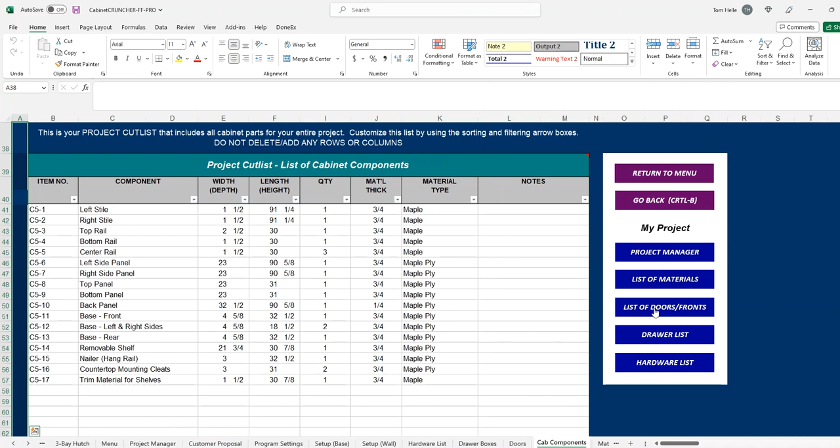Okay, so now everything's pretty well set for this cabinet, and I can make any final changes that I want to. And I'm just going to go ahead and add that to my project. So I'm going to click this Add Cabinet to Project button. And now I've got my cabinet here. And if I wanted to, I could go look at my list of materials, and my project cut list is getting started. My door list is getting started. My drawer box is getting started. And I've got my hardware list.

All right, so now I'm going to go back and look at my next cabinet. This happens to be the 4-drawer base cabinet here, so I can go right back to the menu, and I can pick up my 4-drawer base cabinet, and this time it's going to just be a regular base cabinet. The width is going to be, in this case, 24 inches. The height is going to be 34.5,

and I can bring in my construction preferences, and I'll scroll down now, and this time I'm going to adjust the overall height here. I can make adjustments to this any way I want to, but I'll go ahead and make the adjustments to my cabinet opening sizes. And again, I'll go in here and say, in this case now I want a drawer front, and I'll put just one of those, and I'll do the same thing for these next openings. These will be just stacked drawers, and that is all finished.

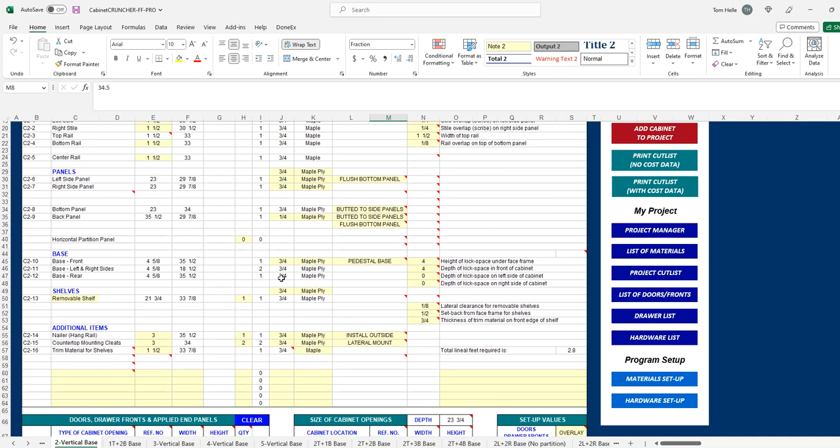So I can go back to my menu screen. I can pick up this 2 vertical, and in this case I've got a 36-inch wide, and again it'll be 34.5 inches tall. And I can come down here and I can import my cut list settings, and I can come down, and in this case I can make my adjustments to my upper opening size, and I've got this set up how I want it, and I put my hardware requirements in.

I got a couple of drawer slides, and I got a drawer handle. I got one of those, and I've got, let's see, a couple of doors that I'm installing on that cabinet, so I'm going to have 4 hinges, and then I'm finished with this one. And I can go ahead and add that to my project. And now I've got my 3 cabinets in there, and I can continue on with all the rest of these cabinets if I wanted to, but you get an idea how quick this is to work with.

So now that I've got my cabinets in here, I have a very good idea. First of all, I've created the cut listing for all those cabinets, but I also know that I've got a list of materials, and I know how much my materials are going to cost, and my hardware, and everything else that I want to install in this cabinet.

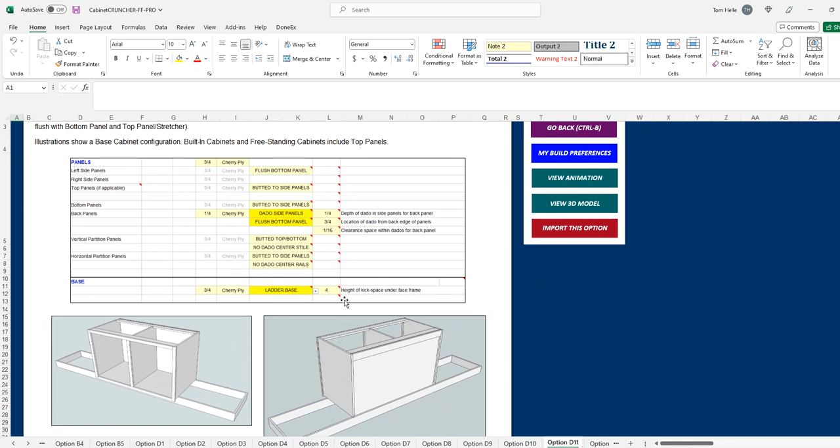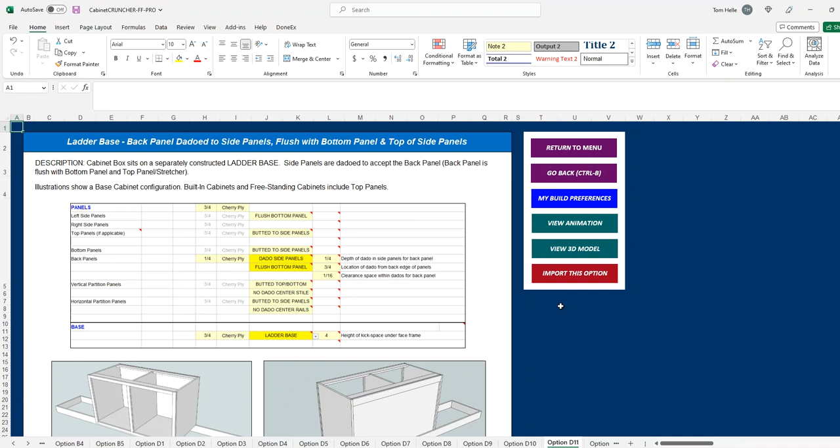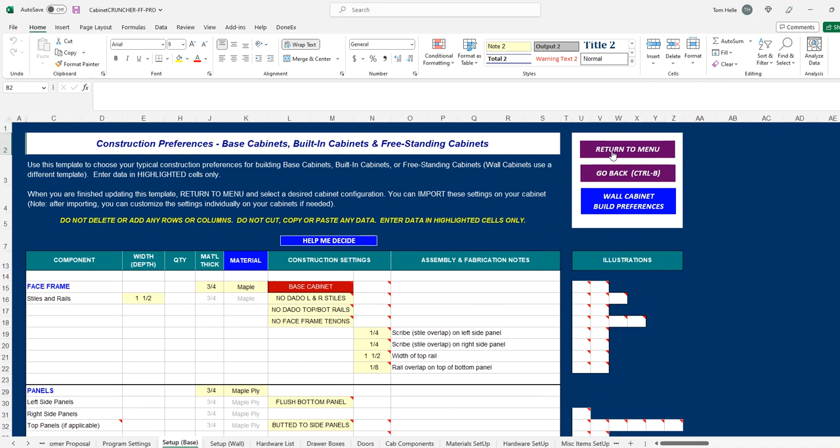So I can go over here and take a look at that and say, yeah, this is how I want it. I can open up that 3D model here and take a closer look at just exactly how you would build that particular option. If it's something that I like, I can import those settings into my preferences sheet here, and I can just go back and pick any one of my cabinets that I'm going to use on my project, and simply import those settings in, and it takes a lot of workload off. It just takes a few minutes to finish up after you're at that point, because a lot of these settings are already adjusted based off your construction preferences.

So you really need to focus on the overall width, height, and depth of the cabinet, how you want to adjust your cabinet openings and what those openings are going to be used for, and install any kind of hardware items that you want. But when you're all finished, you can come over and print all these cut lists off, or you can just simply work off of the project cut list, whatever you want. But if you do print these off, this is very easy to do. You can just come in here and make your changes and print it, and you're good to go.

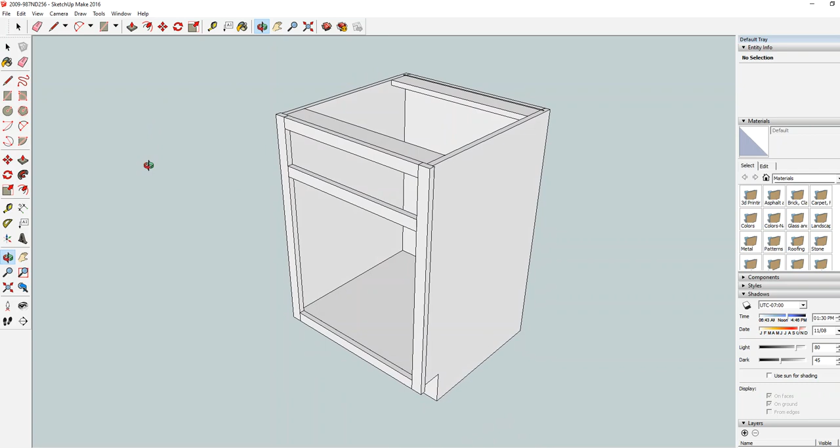And the way I would do that, I would look for a configuration with 4 drawers on the left side and 2 on the right. So I can come in here and look for what would be a 4L2R, and there I've got my 4L2R. So I can make all those changes that I want. I can update my project in such a way that I'm now building just a single base unit that's got both of these cabinets combined into a single unit. So that's a great way to build cabinets, and you have, again, a lot of flexibility with the program to build your cabinets really how a custom cabinet maker would make them.